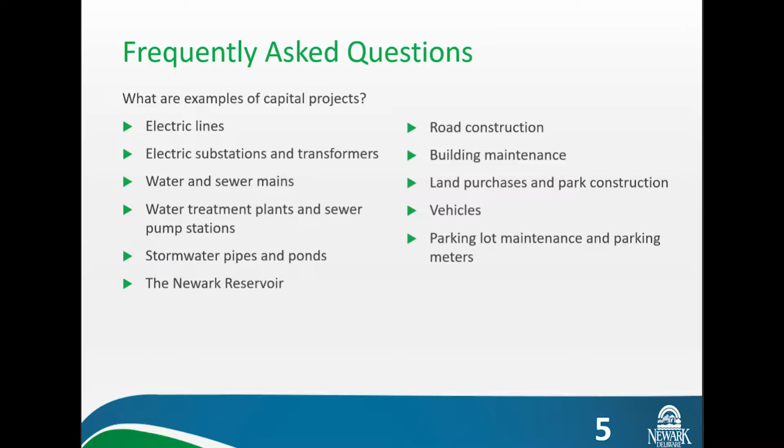What are some examples? For us, capital projects are usually things like what you see here. Infrastructure. The large majority of our capital spending is going to be on items like this, mainly because these items are really expensive. We have a lot of them, and like your house or your car, they need to be maintained or replaced periodically. So how much infrastructure do we have? We have a lot. I'm going to walk through each of our utilities and give you a quick overview so you can have an idea of the scale.

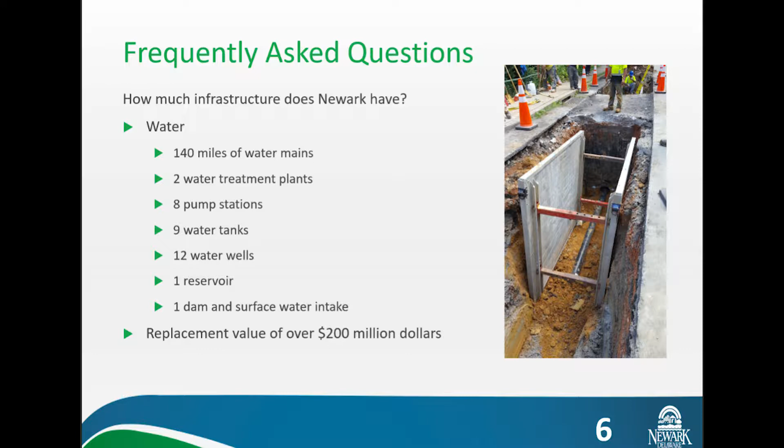We have the most water infrastructure by a large margin, and most of these items are quite expensive. For example, it costs us around $1.2 million to replace 1 mile of small diameter water main, like what you have in front of your house, 6 or 8 inch pipe. In total, the replacement value of our water infrastructure we estimate to be around $200 million if we had to replace everything that's there today. That's almost $6,000 of water infrastructure for every resident in the city, and that's just water.

We also have a lot of sewer infrastructure. Sewer's a little less expensive to replace than water, because it can be more easily rehabilitated. It is deeper, more expensive to actually dig up, but there are trenchless technologies that we can use to restore the pipe without having to dig the whole thing up. We estimate the value of our sewer infrastructure to be around $67 million, or the replacement value rather.

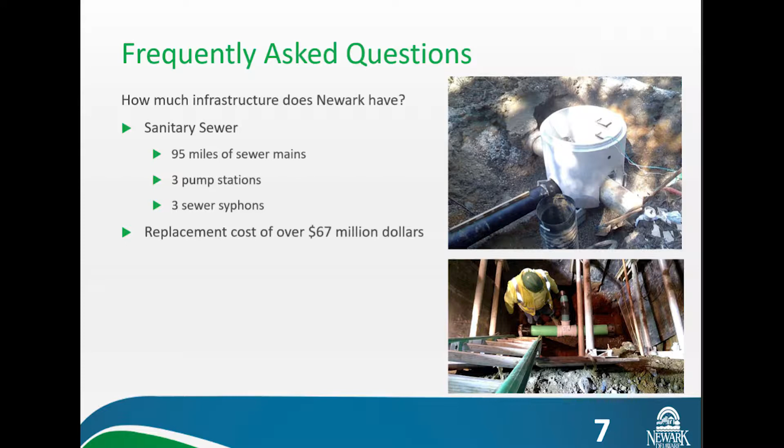Stormwater is a little more expensive than sewer. It's a lot bigger diameter. And stormwater is also unique because we have different materials for our pipes that have dramatically different life expectancies, to the point that we track them and handle them completely separate. Corrugated metal pipe lasts about 35 to 40 years, and we have around 5 miles of that we know of. That's the pipe that's of most concern to us as a city because it's all approaching or beyond its expected life.

The rest of our pipes are generally reinforced concrete pipe, which is expected to last around 100 years, or high-density polyethylene, kind of that black ribbed plastic pipe, which also lasts around 100 years. In addition to our pipes and catch basins and things like that, the drainage in your streets, we have 65 city-maintained stormwater ponds and stormwater facilities that we have to maintain.

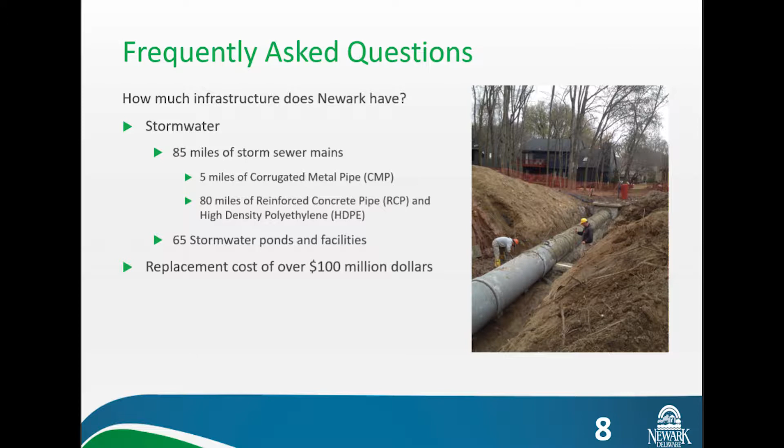We expect our stormwater infrastructure is about $100 million. Our electric infrastructure is made up of substations, power lines, transformers, and our McKees solar facility off Cleveland Avenue. This is, I would say, our least confident replacement value, because we've been just working the numbers up now. We estimated it's at least $50 million, probably a lot more than that, but we want to be conservative in the number that we put up.

In addition to our traditional utilities, we also have parking infrastructure consisting of all our downtown parking lots and meters. Our parking fund is treated the same as a traditional utility, so the money is held in a separate enterprise fund. It's segregated from the general fund, and then we transfer a profit margin over to the general fund each year.

Lastly, we have our general fund infrastructure, which is our city-maintained streets, city hall, police station, parks, and other city-maintained facilities. That's the infrastructure that's supported with your general taxes and fees. And the margin transfers, like I said, we transfer about 20% out of each of our utilities each year into the general fund to cover those general fund expenses.

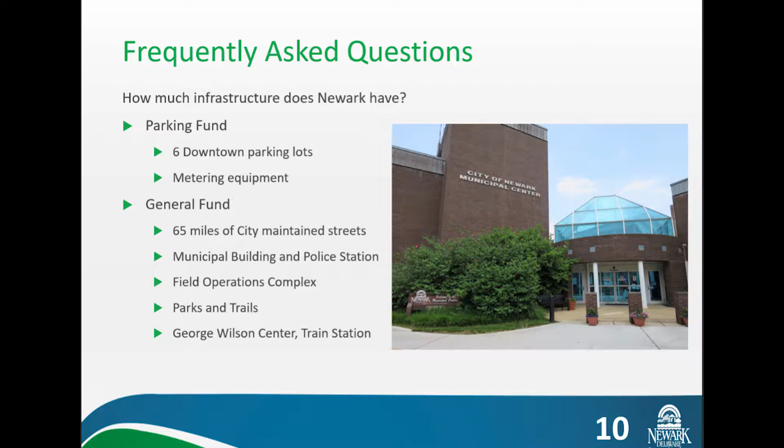In total, we estimate the current replacement value of our infrastructure as a city at around $500 million. That's a huge number for a city of just over 33,000 people. That means we have over $15,000 worth of infrastructure for every resident of the city. The vast majority of it's underground, or at least out of sight, out of mind. So it's easy to forget about it until you hit a pothole with your car, or your toilet won't flush, or the lights go out.

While it's helpful to know how much of everything we have, it's even better to know what condition it's in so we can plan. So what's the condition of our infrastructure? I'm going to go through each type in the same order, so you'll see we have different levels of information for each utility. Starting with water, I'm going to focus on mains because they make up the majority of our assets. Getting good condition assessment information on water mains is very difficult because they have to stay under pressure at all times to remain in service during the assessment.

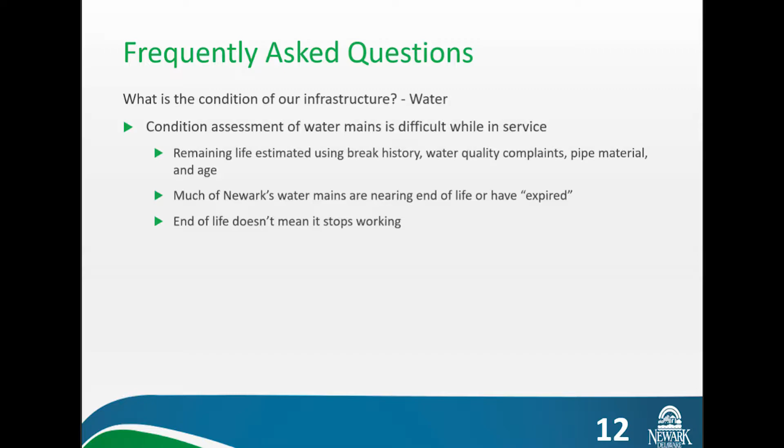We've begun piloting some technologies that will allow us to indirectly measure the remaining life and the condition of the pipe, but we haven't implemented that widespread yet because it's expensive and it's new. In the meantime, we use a combination of our main break history, water quality complaints, pipe age, pipe material, and industry guidelines to estimate the remaining service life to prioritize our replacement. As I'll show in the next few slides, a lot of our water mains are going to hit or exceed their expected lifespan and expire in the near future. It's important to note that expiring doesn't mean the pipe will stop working. I'll explain that a little more later.

This is what we like to refer to as the bathtub diagram, and it shows a general failure pattern for pipes. You often get a quick round of failure right after it's installed, when any manufacturing defects might break or wear and pop early. And then you get a nice long constant failure rate phase where you might fail every 20 years or 15 years. And then once it gets near the end of its service life, the break rate kind of exponentially picks up and it starts to fail more often. For water mains, that's most often due to corrosion. The expected life varies depending on the pipe material, manufacturing methodology, and the installation methods. The longer the life, the longer you have in this nice section there.

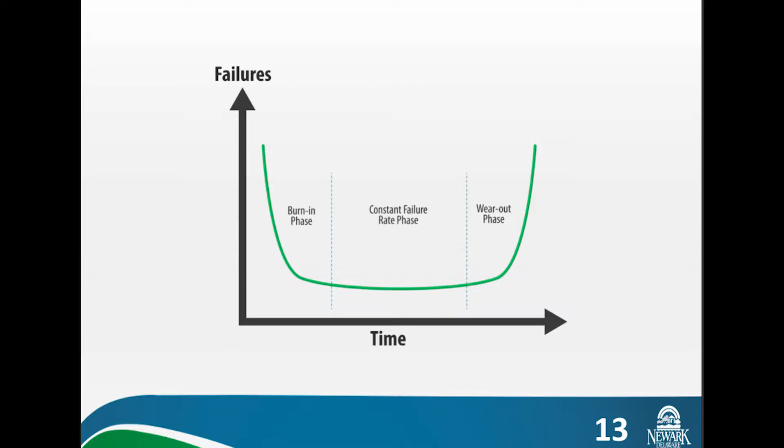So one weird thing with water mains is that older isn't necessarily always worse. Our oldest mains, like what we have in Main Street, were installed before World War I, turn of the century. Our Main Street main was put in the 1800s. They have an expected life of 100, 120 years or more because they were very thick. The manufacturing methods weren't great, so they had to build them robust. Mains that were installed in the middle of the 20th century have a much shorter life, sometimes as low as 55 years, depending on the soil conditions and the way they were installed.

And the water mains we've installed since 2016 or later should be back up above 100 years because we're using more advanced laying practices and wrapping them basically in a plastic bag to keep the soil off the pipe and prevent corrosion. So this slide gets into what I mentioned earlier about a pipe expiring.

When you'll hit that break-even point depends on a lot of things, like I mentioned earlier, the pipe material, manufacturing, and a lot on soil conditions. We're working right now to develop an accurate estimate for the age of all 140 miles of our pipe. That's going to take a long time.

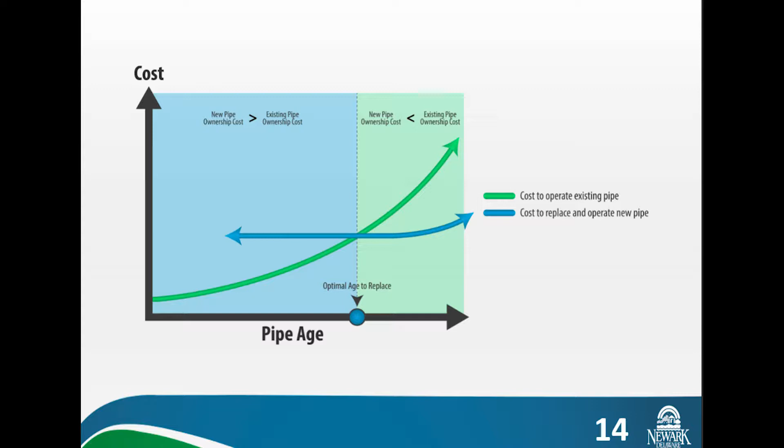For the sake of this presentation, I'm going to show you information using recommendations from the American Water Works Association, or AWWA, which is to assume 70 years average life for water mains. We feel that based off areas of the city where we're experiencing advanced break rates, that's pretty accurate for Newark, or at least for a lot of areas of Newark, or at least accurate enough to give us an average idea of our conditions. So this is a map of our water system.

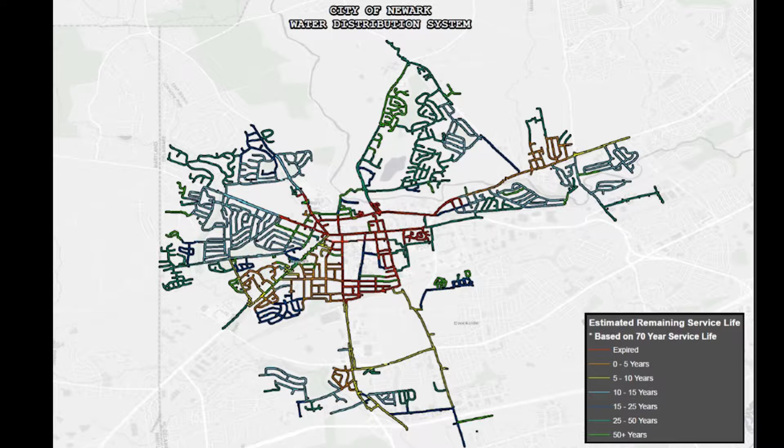All right, thanks, Tim. Today, about 15 miles of mains are in the expired category in the city. That's about 12% of our system.

And this is only our distribution system. It's not our raw water system that carries water from our wells and intakes to the treatment plants. Based on a recent study by Utah State University, the nationwide average is 16% expired, so we're doing a little better than the rest of the country.

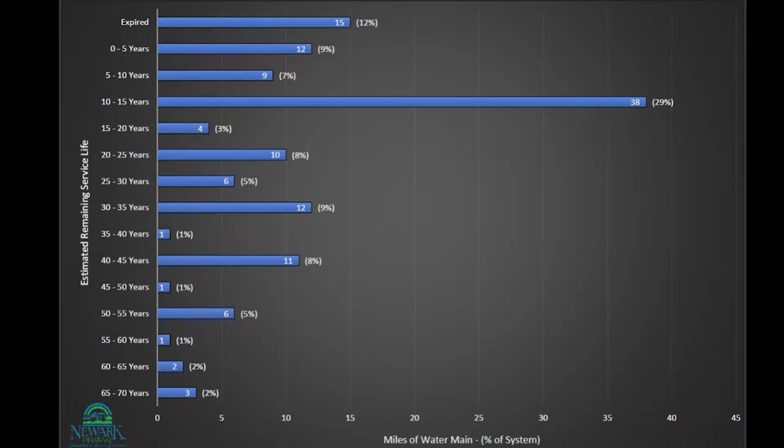But that's going to change considerably in the next 10 or 15 years when this kind of echo—it's almost like an infrastructure echo of a building boom following post-World War II—comes through the city, and we'll be in significantly worse shape soon. So what does this mean for Newark?

Each one of these breaks is generally accompanied by a service outage for people in the immediate area, occasionally by a boil water order. I know at least 2 people in the crowd here have had to deal with that. And they have a negative impact on the quality of life and, if near a business, on their revenue. Like I said, the pipes don't stop working, they just stop working well.

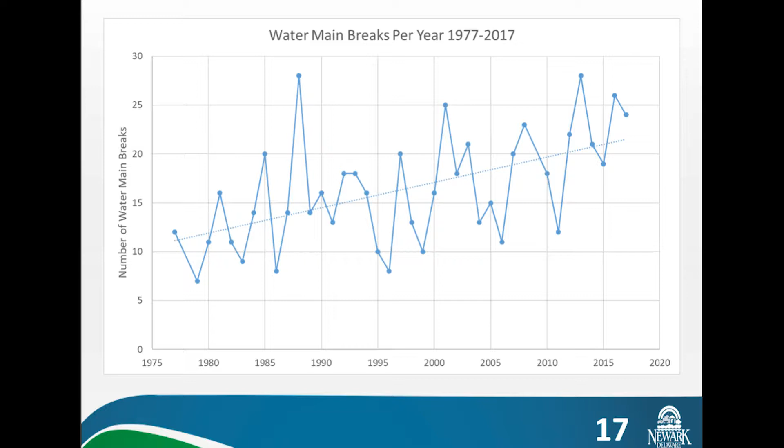Moving on from water mains, starting in 2011, the city began increasing water rates from an artificially low rate that was in place prior to that, which allowed for a capital project initiative to go underway. We really started pumping up our capital maintenance efforts.

While water mains make up the majority of our infrastructure in dollar amount, these other facilities have a much shorter life, like our water treatment plants—these are more like 30 years—so they punch above their weight from a budget perspective. We've been really busy over the last 7 years, and we've completed over $17 million in water fund capital projects.

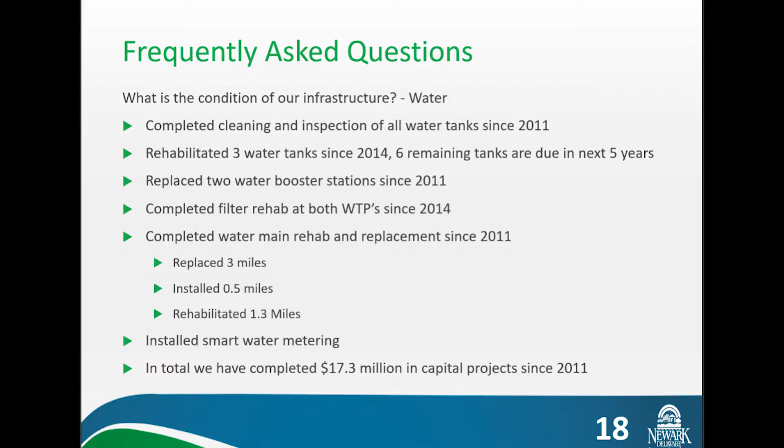We also have 2 water treatment plant projects that are either currently underway or expected to be completed in the next 12 months. The first is replacing our pH adjustment system at South Wellfield with a new, lower cost, more effective system. The second, just approved by council at the last meeting, is to convert from chlorine gas to a bulk liquid system, like what we have at South Wellfield. It's much safer and more consistent.

So we are still doing projects despite the current effort with the referendum.

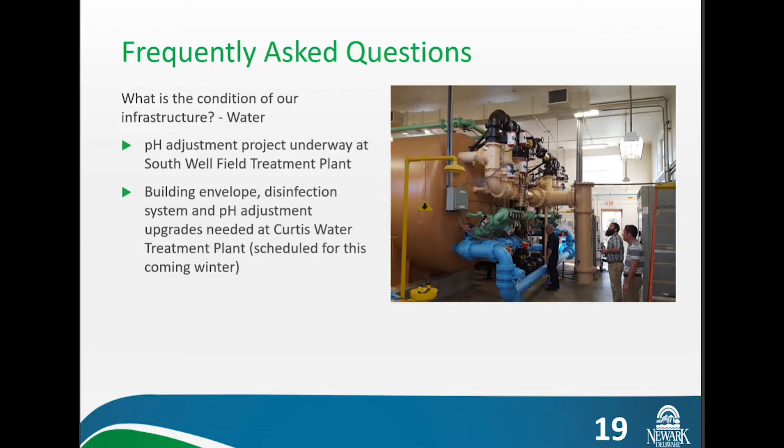On the sewer side, we've been working to inspect and develop a prioritization for rehab work. Sewer is much easier to inspect. So far we've inspected about 10% of the system, and in that 10% we've identified around $2.3 million worth of high priority repairs that need to be made. We began making many of these repairs during 2017, and we have another project underway right now.

Since 2011, we've spent nearly $4 million on sewer capital projects. We've rebuilt all of our sewer pump stations to modern standards.

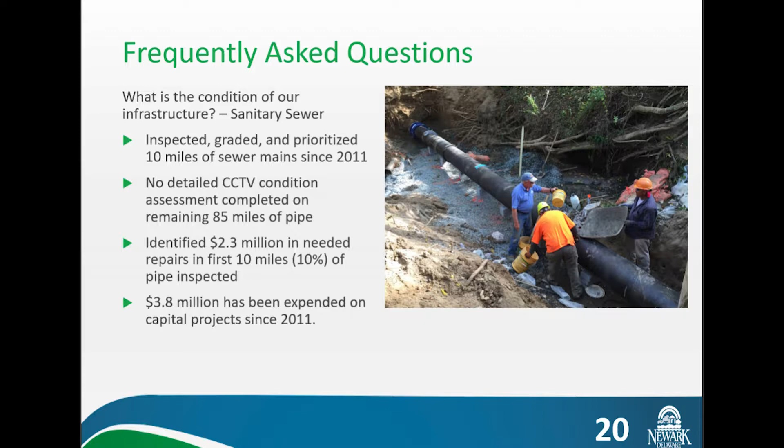On the stormwater side, as I mentioned earlier, we've been focused on corrugated metal pipe, which has a much shorter expected life than concrete, and we've been experiencing failures all over the city. Starting in 2016, we completed a citywide assessment of all the known corrugated metal pipe and prioritized it for repairs. In total, we identified $3.4 million of necessary repairs over the next 10 years.

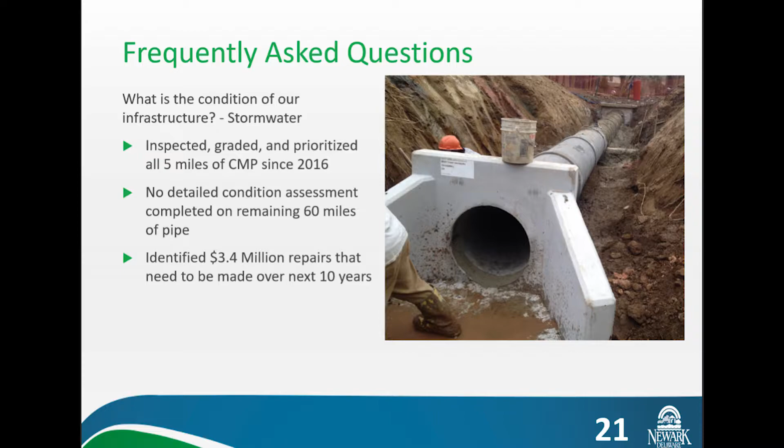As many of you may be aware, council authorized the creation of a stormwater utility, effective January 1st of this year. Because of that, we have a stable funding source designed to provide an adequate amount of money to meet our operating expenses and complete these repairs over the next few years. The current rate, however, will not cover the cost of the proposed Rodney project, which would result in the need to increase the median household stormwater bill by a little over $1 a month. We'll get into that later.

For our road network, we have a full pavement management program where we complete an annual inspection of all the roads in the city. We rate them, and then we run them through an optimization program in an effort to develop an optimal project.

If we want to keep the city-maintained roads—not Main Street or Delaware Avenue or those that are in terrible condition, but all the neighborhood streets and ones that don't have a road number—the same as they are today on average across the whole city, we need to be spending about $1.75 million a year, every year, a number we've only been able to achieve one time since 2011.

In addition to that, we have $1.5 million in parks capital maintenance that's taking care of things that exist today, scheduled over the next 5 years, that needs to get done.

So how did we get ourselves into this position? One reason is we've been using only the cash we have on hand, which limits our ability to tackle large projects because they crowd out smaller, less sexy replacement projects and preventative maintenance. It's a lot more exciting to have a new ribbon cutting than replacing an underground pipe that's generally worked the whole time you've been alive.

Our water and sewer rates are also entirely consumption-based, so they fluctuate considerably with the weather, resulting in a less predictable revenue stream. That's something we're working with council to address. And nearly 50% of Newark's land area is tax exempt, which puts us in a deep hole that we have to dig out of when it comes to paying for general fund services like police.

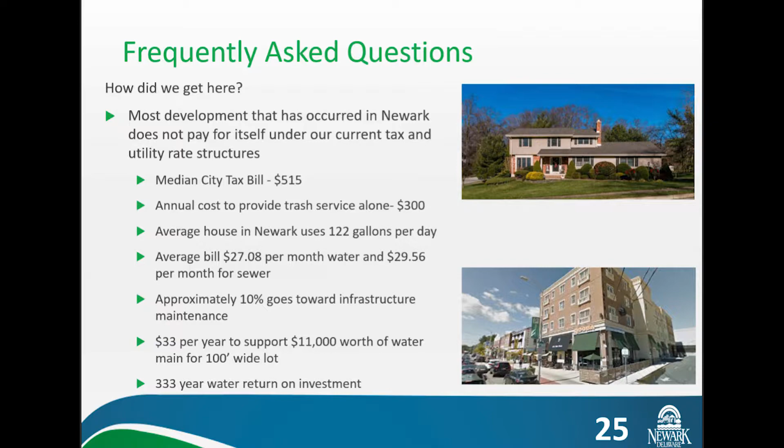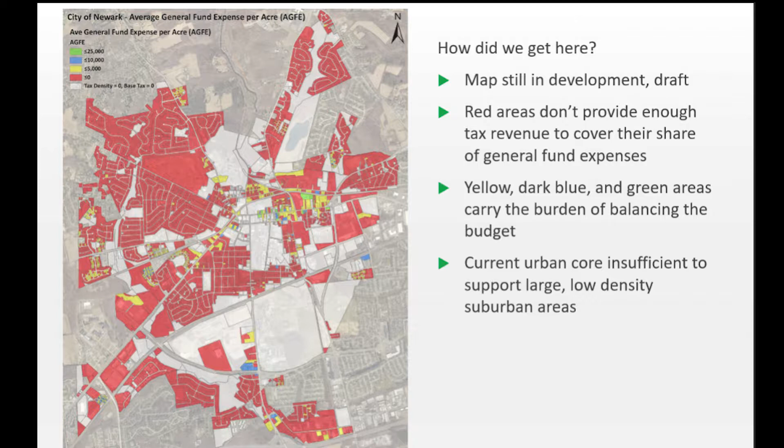As you can see, in general, single-family detached housing is negative, which means if we were to approve a new single-family detached neighborhood today, it will make us poorer as a community because we'll be taking on more liabilities than revenues. Higher density development like townhomes and downtown mixed-use projects, on the other hand, will help reduce the need for future tax increases because they pay for more than their fair share.

I said this at the last one, I didn't at the first one. I don't expect everybody giving the side-eyed looks at their neighbors because they're in one of these red neighborhoods. I'm not saying that the red neighborhoods are bad, I'm just saying that we need to know that the red neighborhoods exist because the first thing to addressing a problem is acknowledging you have a problem.

So we just want to avoid more of this, or at least if we build it, we need to build some more of that to offset it.

So I know up until now the presentation's been a lot of doom and gloom, but it's not all bad news, and it's definitely not unique to Newark. Cities all across the nation are looking at the same problem, whether they know it yet or not.

Illinois, for example, just determined they need $21 billion per year for infrastructure, when historically they've spent closer to $3 billion. When you consider the entire state budget is just under $38 billion, you can see they're in a little bit of a problem.

Fortunately for us, I think we're in a much better place than a lot of other cities for several reasons. First, there's a will on council to tackle the problem, which is why we're here today talking about taking on debt to get in front of it. We're also a relatively compact city compared to our peers. Dover, for example, has 2.5 times our land area, but only 10% more people than Newark. So they are in a much deeper hole than us.

We're in the fortunate position to have the Star Campus, which is going to be bringing all new tax revenue to the city. Every private project that's completed there is tax revenue, it's utility sales, electric, some of them water, all of them sewer, and that's all utility sales that we didn't have before. So we never provided electric service to Chrysler. And those new sales will be able to offset some of these costs as we move forward in the future and as that site develops. Help us keep electric rates low. Maybe that offsets the fact that we have to raise some of our other rates.

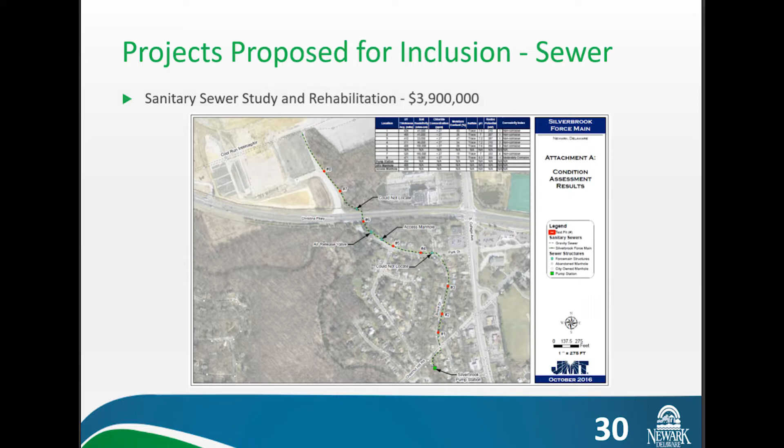If you drive close to Main Street on Thursday or Friday, they'll probably have part of McKee's Lane closed. They're going to be doing one of these, and Stu, we're going to reach out to the council folks to see if they want to actually see one of these things go in. So look for that invitation. It should be.

But as Tom also mentioned, we haven't stopped working. We've completed about $1 million worth of these types of repairs in the last year, mostly getting the sewers repaired on Main Street ahead of the full restoration that DelDOT plans for later this year into 2019.

Main Street will be a complete reconstruction, so there will be headaches. But when it's all said and done, it'll be a smooth road, and every 10 to 15 years, it'll be a quick mill and overlay. It'll be very quick. So a lot of pain in the next year and a half on Main Street, but we will get through it.

They're going to do some patching sooner. Yes. So the patching that they're going to do in June is not the full fix, but it's the fix that's going to carry us through. So just be patient, and I can't promise, but it'll be a lot better.

So now we'll move on to stormwater. This is probably one of the projects that a lot of people don't equate with the other projects. This is a completely new project that not only solves a problem that we have here in the city, but it also does it with some style. I've mentioned before in some of my presentations that no one should just see a hole in the ground. So we've brought parks along. Joe threatened me that if we didn't put a park on it, he wouldn't support it.

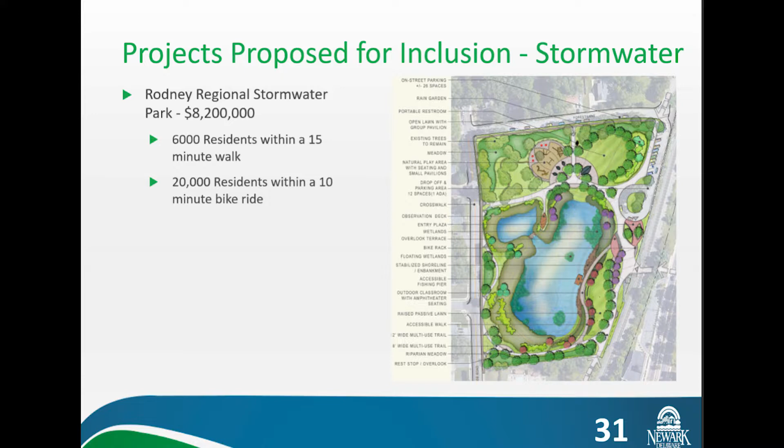So moving on to general fund projects. You heard Tom speak of general fund projects. These are the projects that are necessary for the operation of our city, yet always seem to get a lower priority ranking, as Tom mentioned earlier, and Stu brought up. They always seem to get a lower priority ranking simply because the utilities and things win out over these when we're looking at the budget and saying, okay, we have X amount of dollars, we can only do X projects.

We have done a great job of following the plan. We're down to about 400 ramps left. Don't quote me on the number, but we started off with about 1,200 to 1,800, and we're down to about 400 left. So we're about 10 years away, because we do about 40 a year with the funding that we're allocated. We joke that in 10 years when we finish, the federal government will come out with some new standard and we'll have to start all over again, but we'll cross that bridge when we get there.

So the hard surface improvements. We've mentioned parks before. Parks are a major part of our city. We have Red Park just behind us, and then it leads down into the city, and the Reservoir Park and the Paper Mill Park, the Curtis Mill Park. There are a lot of improvements that need to go into those parks to make sure that they keep drawing people to our city and allow the folks in the city to utilize them. So this includes the courts, the trails, and the parking lots.

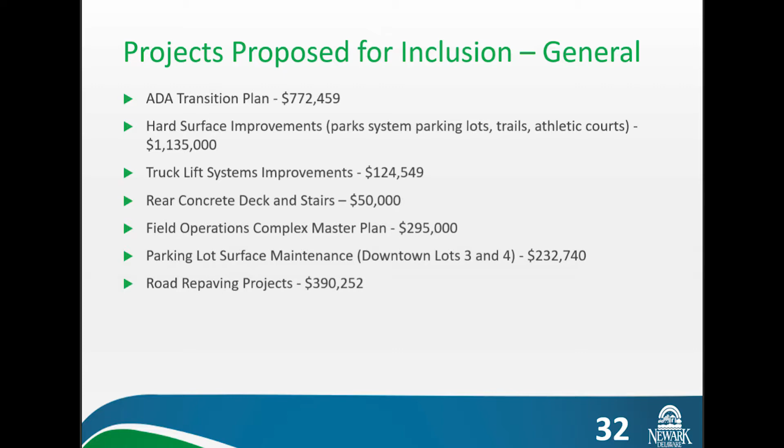And the road repaving projects are similar to the ADA transition plan. We do an annual project to pave the roads, and as Tom mentioned, we have not hit our goal. We've only hit our goal of $1.75 million once in the last 8 years, just to keep us where we are as they continue to deteriorate. So I think that is all for me. I'll turn it over to Dave, and he'll give you some of the meat and potatoes here.